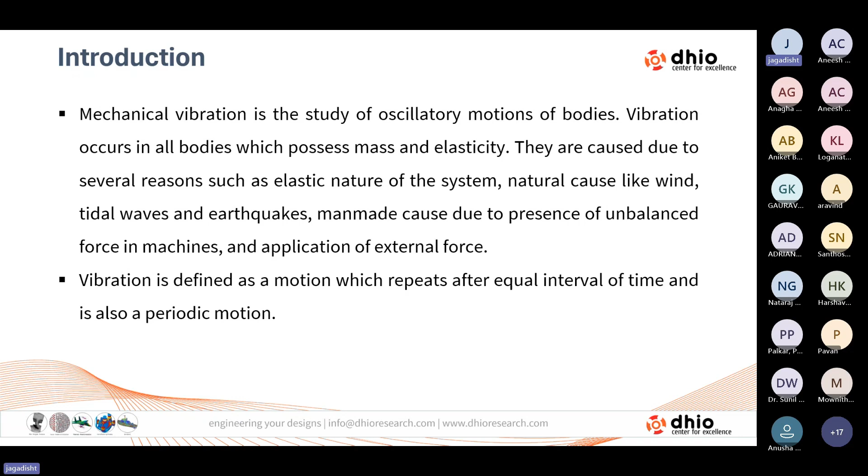So vibration is usually defined as a motion which repeats after equal intervals of time, and is also a periodic motion. That means the motion will repeat itself after a certain duration, which we call the time period of motion.

Vibrations are harmful or undesirable for engineering systems as they induce high stresses in the system components, leading to noise and failure. But here we are not discussing the desirable effects of vibration, because those have more advantages which we are not touching upon.

It is only the undesirable effects which cause harm to human beings that we will discuss. The vibrations which are undesirable and harmful are to be minimized, if not totally eliminated.

Excessive vibration causes discomfort to human beings, damage to buildings and machines, and wearing out of machine parts due to this vibration. Thus, an understanding of the basic fundamentals of vibration analysis is very important in forming

or in developing a solid background to analyze the problem of machine elements in design, and to see that vibrations are reduced to the extent, to the limit, that is exactly required.

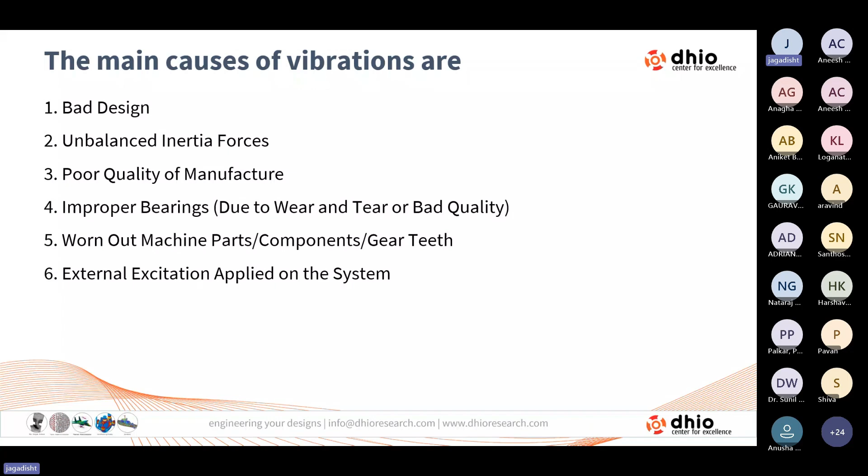Or it may be caused due to external excitation applied on the system. These external excitations may be of anything - either in the form of forces, or in the form of displacement, acceleration, or velocities. Now the effects of vibrations are as follows.

Due to this vibration, there is earlier failure due to cyclic stress. That means since the motion is going to be repeated, and if the forces are considered during this action of motion, the loading is fatigue loading and not the conventional type of loading.

All materials are observed to behave totally differently when subjected to cyclic load compared to static load analysis.

And due to this vibration, there may be an increase in wear and tear of parts, and due to this wear and tear, there may be excessive unwanted noise.

And if these kinds of parts are incorporated in the machine which produces a certain product, the product coming out of that machine may be of poor quality. So when these poor quality products are there, they're difficult to sell.

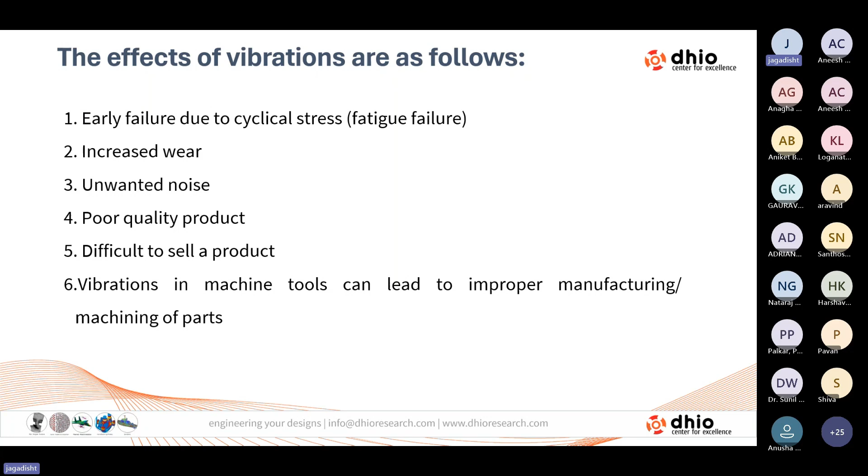Thus, vibrations in machine tools can lead to improper manufacturing or machining of parts. Now, when you want to describe the complete behavior of any dynamic system, the complete description of the vibration problem involves mainly three components.

And these components are the system, the vibrating system, and then the external stimuli, or what we call the excitation.

Due to this excitation, the system is going to be responsive. All machines can be broken into two specific categories, consisting of mass and stiffness. The mass represents an object which moves or rotates, that is, there is a certain amount of displacement in it.

Whereas the stiffness is represented by a spring, or a resistance, or a constraint of that movement. The stiffness of the body is nothing but the internal resistance offered to the displacement. So the mass and stiffness play the key role in the dynamic behavior of the system.

To reduce the vibrations, certain instruments or elements are to be incorporated to absorb the vibration energy, which we usually call damping. So every vibrating system in general comprises three parameters.

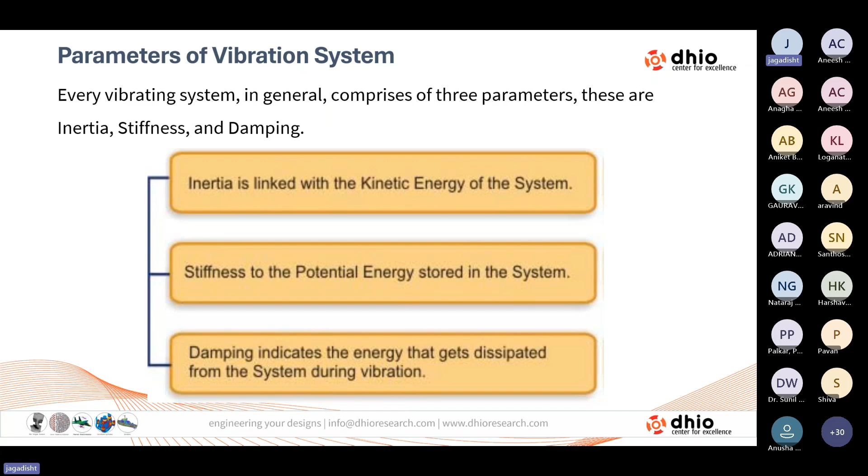We see which is causing the main reason for inducing the vibration, or if we want to reduce the vibration, how exactly the damping is to be looked upon, and whether the mass or the stiffness needs to be increased or decreased, can all be looked at in the design stage itself. So when we classify vibration, there are different methods of classifying mechanical vibration.

These are completely based on the type of vibration, the degree of freedom, the displacement, and the behavior of the system. When we talk about the type of vibration, whether it's free vibration or forced vibration: free vibration occurs due to the inherent properties of the system without any external disturbance, while forced vibrations are caused due to external excitations.

Now, whenever the system is completely vibrating due to its inherent property, without any external forces and without any energy loss, we call that an undamped system. If there is any kind of energy loss, we call it a damped system.

Then, depending on the degrees of freedom, we define the vibration as single, two, or multi-degree of freedom, or it may be a continuous system with infinite degrees of freedom. Single, two, and multi-degree of freedom systems consist of rigid bodies, whereas any body which is continuous, we call a continuous system with infinite degrees of freedom.

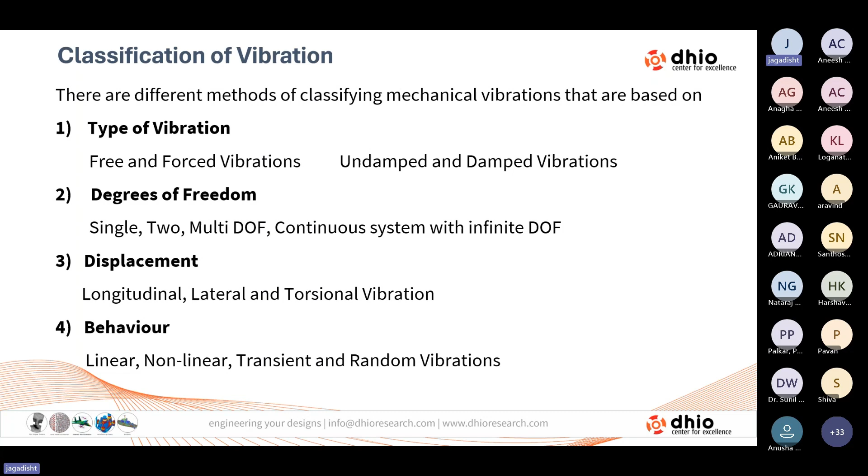If the behavior is due to sudden application of loads acting for a short duration of time, we call that transient response. And if the external excitations are random, and the behavior of the system is also random in nature, then we call that random vibration. In transient response, the system acts for a short duration of time, and the response decays back to its equilibrium position after a certain duration.

Now, certain notations are commonly used in studying dynamic systems. First is the time period—it is the time required for one complete cycle, or one to-and-fro motion, and its units are always taken in seconds.

Then we have frequency. It depends on whether it is translatory displacement or rotational displacement. It is the number of cycles per second, with units of cycles per second, defined as hertz for translatory motion. For circular motion, we call it circular frequency or angular velocity omega, defined in radians per second.

Then we also define the displacement as amplitude in dynamics. It is the displacement of the vibrating system from its equilibrium position, and its units of length are generally in millimeters or meters.

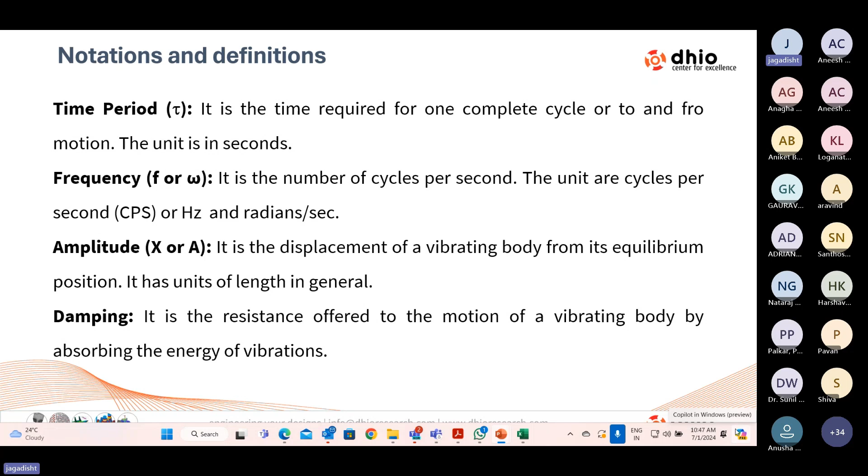Then damping is a resistance offered to the motion of a vibrating body by absorbing the energy of vibrations. There may be different types of damping, which we will look at later.

Then the type of forces or displacement considered in vibrations we call harmonic motion. These oscillatory motions may repeat themselves following a certain mathematical law regularly. When the motion repeats in equal intervals of time, it is called periodic motion. When it follows a certain mathematical law, you call that harmonic motion.

Here we consider a point moving at a constant angular velocity from a fixed point. The constant angular velocity is omega, and it traverses at this constant angular velocity. The path traced by the point P is what we define as simple harmonic motion. As it rotates at this angular velocity, it has been observed that its acceleration is always directed towards its equilibrium.

Its acceleration is always directed towards its equilibrium. When the point is moving at angular velocity omega, at any given instant of time t, it occupies position P. Since OP has distance A from the point of reference, the angle it turns through is given by theta, which equals omega t. Now the vertical distance traveled, y, can be expressed as A sin omega t.

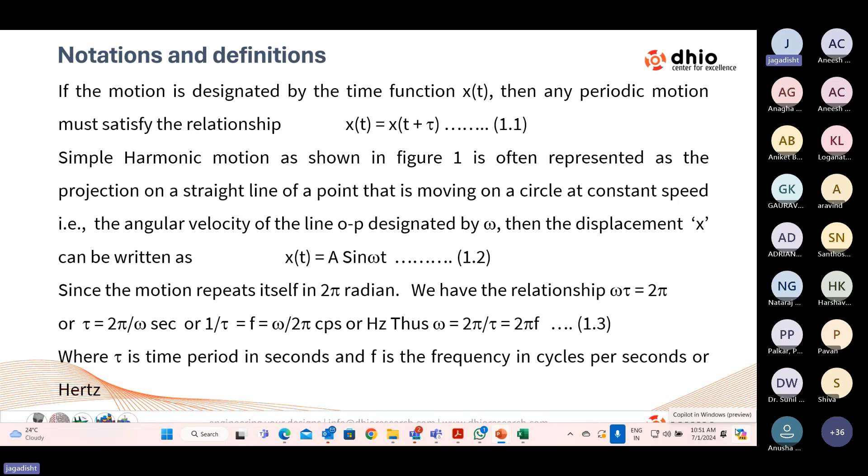Now 1 by tau, which is the number of cycles per unit time, is defined as the frequency, the reciprocal of the time period, which will now become omega by 2 pi. Thus, omega is going to be either 2 pi by tau or 2 pi f, where tau is the time period in seconds or f is the frequency in cycles per second or hertz. Using this, one can easily determine the time period and the frequency of the system.

Now we're using the dot notation for derivatives with respect to time. Any variable, when it has a derivative with respect to time in dynamics, we represent with dot notation. Thus, x is the displacement, expressed as A sin omega t.

The derivative of the displacement with respect to time is the velocity. That is, x dot is going to be equal to A omega cos omega t, which can also be expressed as A omega of sin of omega t plus pi by 2.

Then the second derivative of the displacement, which is the acceleration, defined as x double dot, is going to be equal to minus A omega square sine omega t. This minus sign can be eliminated by replacing sine omega t with sine of omega t plus pi.

Now, sine of omega t plus pi is again equal to the value of minus sine omega t, that is x, which is defined as A sin omega t. So we observe that x double dot is also going to be equal to minus omega square x. Thus, the acceleration is always directed towards the center and is proportional to the displacement, with the constant of proportionality being minus omega square.

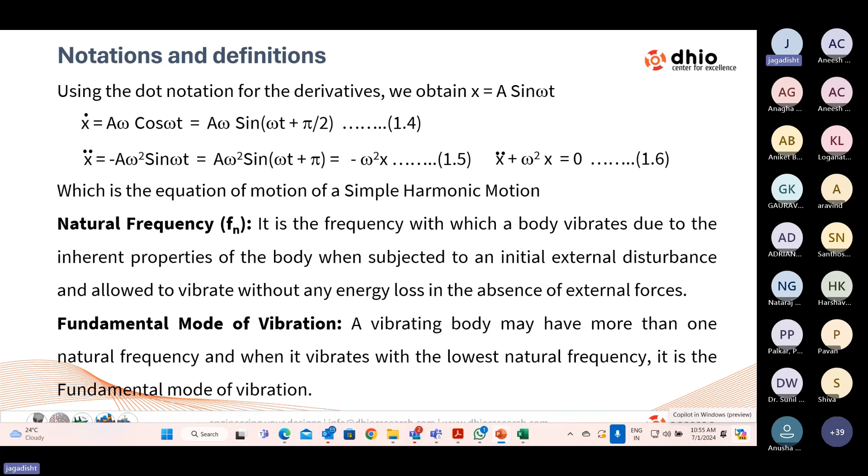Then we have the fundamental mode of vibration. As we see, a continuous system will have infinite degrees of freedom. Thus, any vibrating system may have more than one natural frequency. When it vibrates at its lowest natural frequency, that is what we call the fundamental mode of vibration, that is, the first natural frequency of the system.

Free vibration takes place when a system oscillates under the action of inherent forces in the system itself, when external impressed forces and energy losses are absent. There is no energy loss and no external forces acting. But for any slight disturbance, if the system starts to vibrate, we call this the free vibration of the system.

Now the system under free vibration will be vibrating at one or more of its frequencies, called the natural frequency, which is the property of the dynamic system established by its mass and stiffness alone, because there is no loss of energy. Damping does not interfere in this.

So the natural frequency of the system is very important in the analysis of the dynamic problem, as it provides information related to the dynamic characteristics of the system without external forces and any energy loss.

Now, the vibration that takes place under external exciting forces is called forced vibration. When the excitation is oscillatory, the system is forced to vibrate at the exciting frequency. If the frequency of excitation coincides with one of the natural frequencies of the system, a condition of resonance is encountered, resulting in dangerously large oscillations which may cause failure of the system.

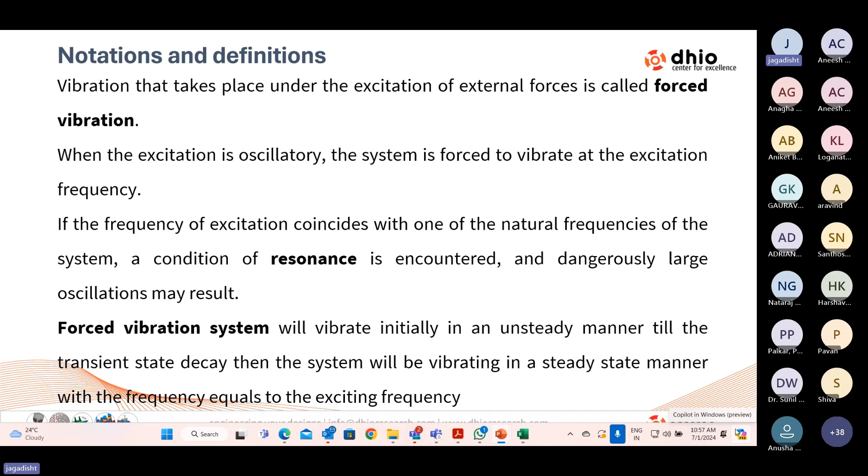The forced vibrating system will be vibrating initially in an unsteady manner till the transient state decays, and then the system will be vibrating in a steady state manner with the frequency equal to the exciting frequency.

Now let us see how, in a dynamic system, we write the equation of motion. It all depends upon the number of degrees of freedom. Depending on that, we'll have so many equations. A single degree of freedom system has one equation; a 2 degree of freedom system has 2 equations; it becomes multi-degree of freedom. An n degree system will have n equations, and a continuous system, having infinite degrees of freedom, will consist of infinite equations.

But one cannot solve all these infinite equations, so it is restricted to situations depending upon the application and the way in which instruments are available for measurement. Depending on that, restrictions about the number of frequencies and equations have to be considered.

This plays a key role in the analysis of any continuous system in the software, because it depends on how many equations you consider for the solution to make it as accurate as possible. Any dynamic system's key role depends on the mass and the stiffness, and to what extent we consider these for determining the dynamic characteristics of the system depends upon the accuracy required.

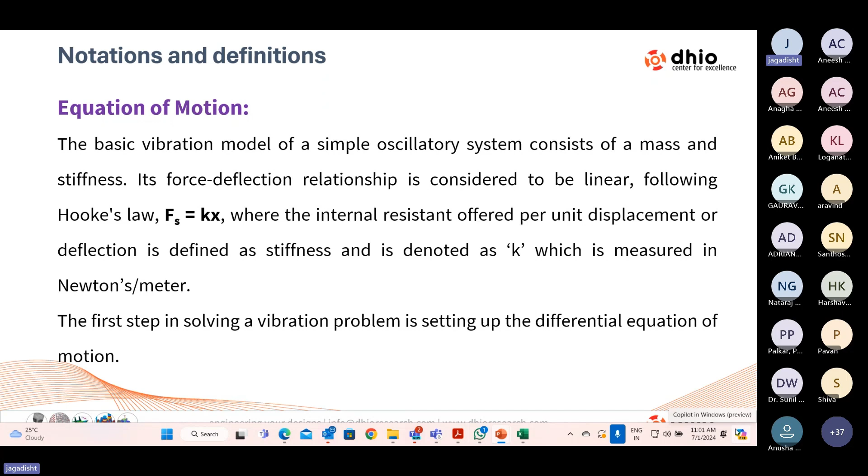The first step in solving the vibration problem is setting up the differential equation of motion. There are three approaches for this: applying Newton's second law of motion, using D'Alembert's principle, or using the energy principle. Any of these can be adopted to set up the differential equation of motion.

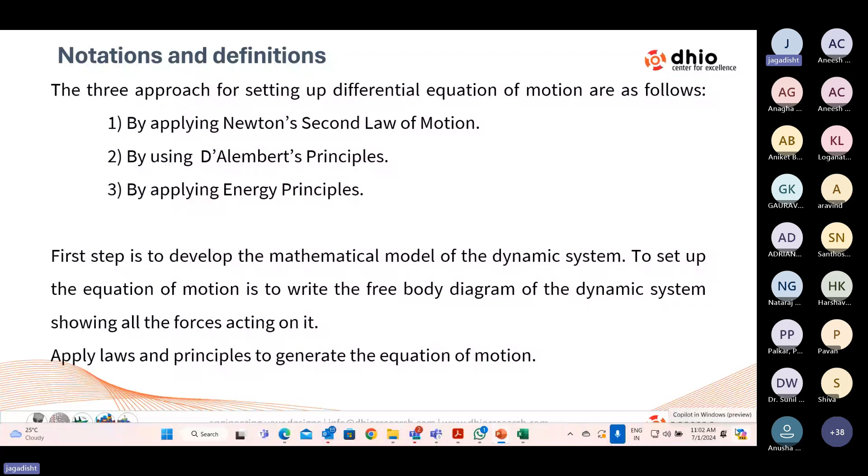Before setting up the differential equation of motion, the first thing to do is create the mathematical model of the dynamic system and study its free body diagram, which shows complete information of the forces acting on the system. Knowing these forces, you apply the laws and principles to generate the equation of motion. Whenever there is an energy loss in the system, usually called damping, this has to be considered so as to reduce the amplitude of motion.

Because most of the systems which are going to be continuously running, when excited, there is a certain region at which there is a variation, as in the initial stage of starting. One cannot start directly to a higher level, it has to be gradually started. Similarly, one cannot stop any of the systems suddenly, it has to be gradually stopped.

Now, during this stage, there is a variation in the frequencies. So when these frequencies are varied, we have to look into it so that this exciting frequency will never coincide with the natural frequency of the system, to avoid resonance, for which to control the amplitude, one has to provide some energy absorbers, which we call damping.

There are various types of damping associated in engineering practice. First is viscous damping, which is nothing but the lubricated sliding surface. Then Coulomb damping or dry friction damping, which occurs due to the dry friction sliding of surfaces. The structural or the hysteresis solid damping, which is due to internal friction in the molecules.

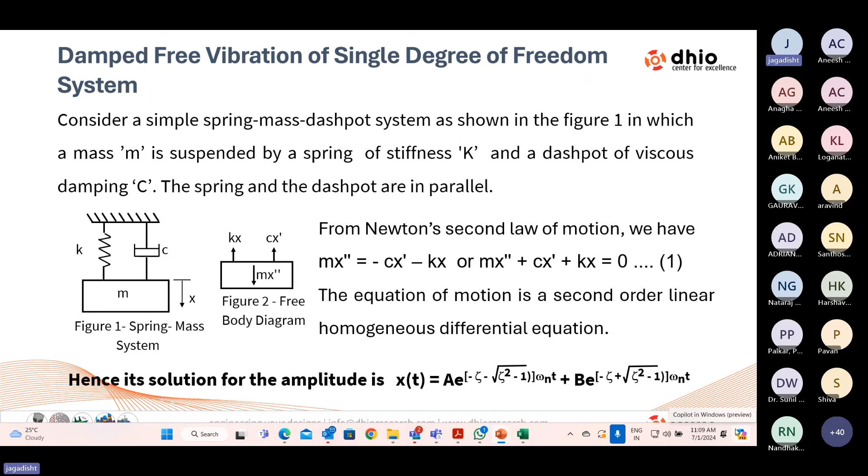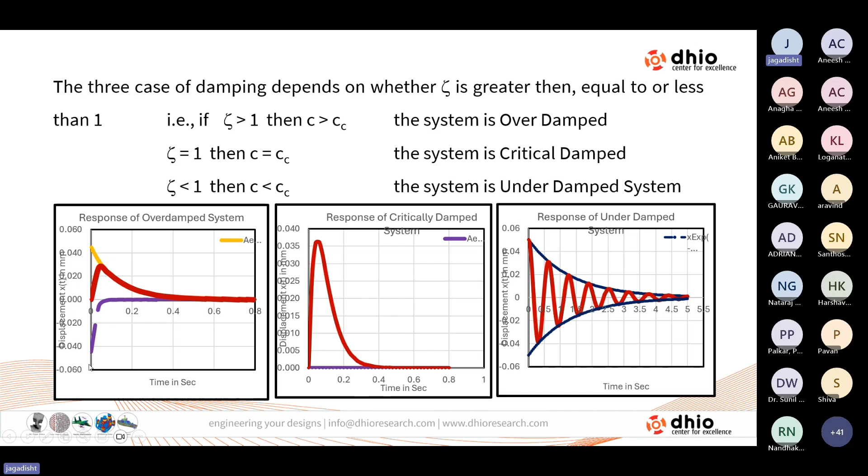We also define, in the case of a dynamic system, the ratios of two successive amplitudes in terms of the logarithm, which are going to have a constant value. This we define as the logarithmic decrement. This logarithmic decrement is going to have a constant value for two successive amplitudes, which is nothing but the logarithmic term of the ratio of the two successive amplitudes.

When the system is disturbed from its equilibrium position, it executes free vibration because of its own elastic properties. When there are no forces, the system returns to its equilibrium, depending upon the amount of damping present in it. In the previous case, for an underdamped system, we can see how much time it takes for decaying.

Now, in case of a forced vibrating system, this external impressed force acting on the system keeps it continuously vibrating. Thus, it is very important for the designer to generate a mathematical model for the system which is being subjected to the forcing function, and then analyze it.

In general, there are three types of forcing functions commonly encountered in engineering practice. The first is the periodic or harmonic forcing function, meaning its time period is fixed, and the variations of this forcing function can be described by simple mathematical equations following a certain law.

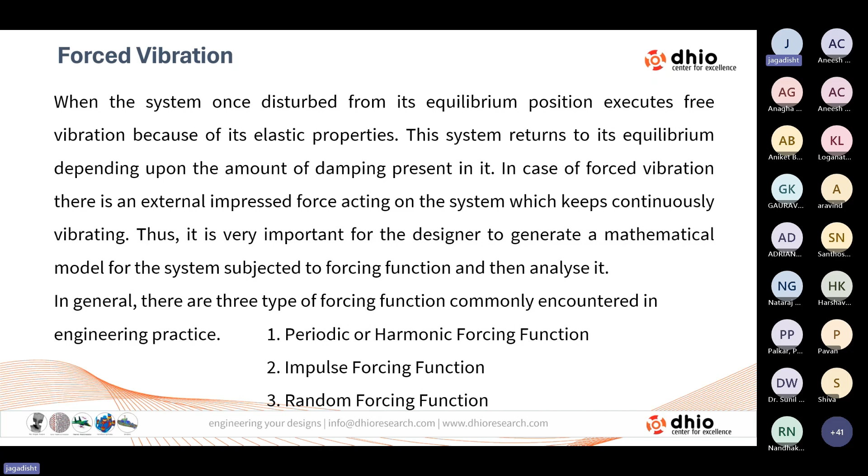The second type of forcing function is an impulse forcing function, which has a very high magnitude acting for a very short duration of time. When the forces are random in nature, we call it the random forcing function.

When the forcing function is harmonic or periodic, the dynamic behavior is studied based on the technique which determines the steady state response of a structure. We don't look at the transient state, because when the force is suddenly applied, initially it may behave transiently, and then after a certain duration of time, it reaches a steady state response. Thus, the general equation of motion will depend upon the force and the displacement.

These force and displacement are also assumed to be harmonic in nature, in which the forcing function F can be expressed as F naught sine omega t, and X as capital X sine omega t, where X is the amplitude of vibration and omega is the impressed frequency of the external forces.

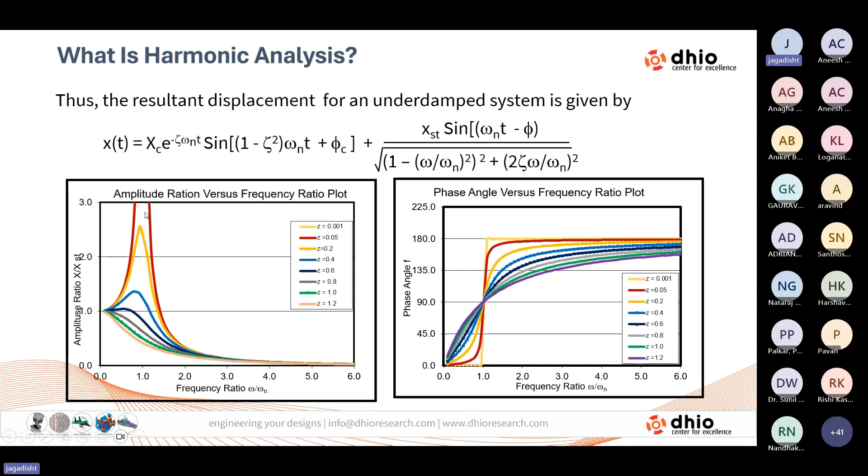Now, when there is a rotating unbalance - in the previous case we considered an externally impressed force - here it may be due to reciprocating or rotating members causing certain unbalance in the force. These unbalanced forces are taken into account and the equation of motion is expressed as m x double dot plus c x dot plus k x equal to m e omega square sin omega t, where m e is the eccentric mass effect.

Similarly, for the reciprocating mass, similar equations can be obtained. This is the same as the previous case where the harmonic force excites the system, except that F naught is now replaced by m e omega square.

Thus the steady state solution is m e omega square divided by the root of k minus m omega square whole square plus c omega square. The phase difference between the displacement and the force is tan inverse of c omega divided by k minus m omega square.

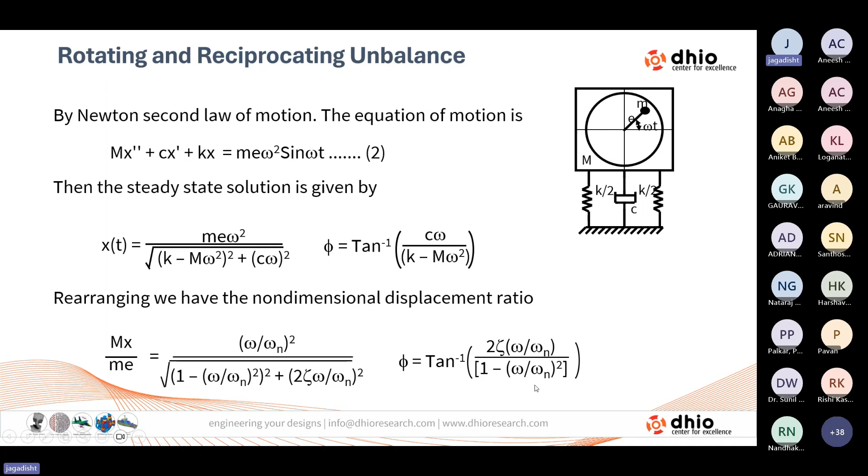Now again, considering the terms in terms of the frequency ratios and expressing the damping in terms of the damping factor, we have the amplitude ratio in non-dimensional form written as m x by m e equal to omega by omega n square, divided by root of 1 minus omega by omega n whole square plus 2 zeta omega by omega n square. The phase difference between the displacement and the forcing function is given by tan inverse of 2 zeta omega by omega n divided by 1 minus omega by omega n square.

Another case of forcing function is due to support motion. Instead of an external force acting on the system, if the support itself has certain motion, one can describe the dynamic behavior of the system. If the support is harmonically excited as y equal to capital Y sin omega t, the mass of the system will have displacement that is also harmonic, given by x sin omega t. The equation of motion is m x double dot plus c x dot plus k x equal to c y dot plus k y. This again gives us two types of response: one is a partial transient for a small duration of time, and then the steady state response.

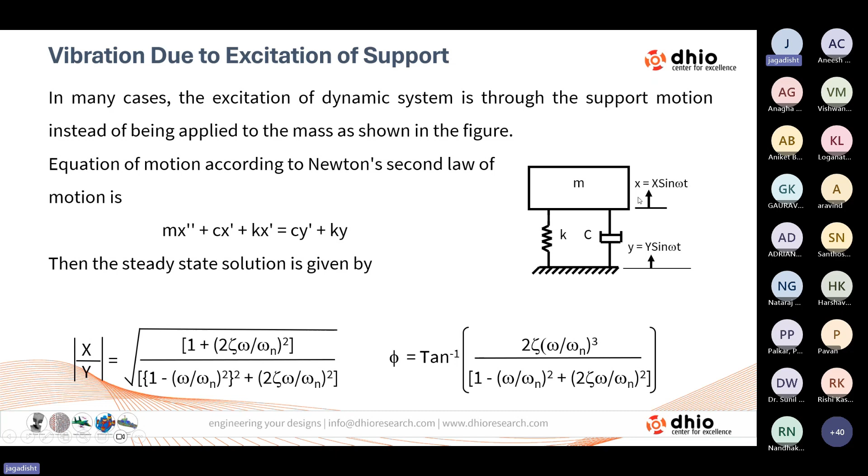Usually the transient response is neglected; it is the steady state response which gives us the complete information. The steady state solution is given by the amplitude ratio of the mass motion to that of the support motion, x by y, given by root of 1 plus (2 zeta omega by omega n) square, divided by (1 minus omega by omega n square) plus (2 zeta omega by omega n) square. The phase difference between the displacements of the support and the mass is given by this expression.

The same expression can also be used for what is called transmissibility, which arises due to motion or due to force. In certain cases, specifically in measuring instruments, we try to measure the amplitude, velocity, and acceleration, and for this we make use of this theory to see how exactly the information is being captured, or if the force is transmitted to the foundation or to the machine, both can be observed here.

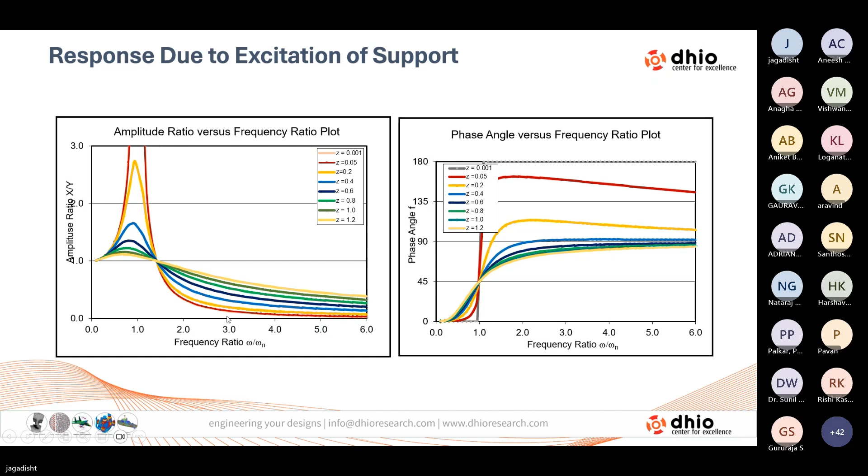Since the mass is in the denominator term, as you reduce the mass, the frequency increases; as you increase the mass, the frequency decreases. Whereas in the region where the frequency ratio is greater than root 2, the damping does not play much of a role; it is the stiffness of the system which plays the key role in the behavior of the system. So these are the things which are to be looked upon.

Now, exactly how vibration isolation has to be done: as we discussed, isolators are vibration absorbers placed between the vibrating system and the supporting structure. The isolating material may be a pad of rubber, felt, or cork, or a metallic spring, or a viscous damper. The effectiveness of isolation may be measured in terms of the force or the motion transmitted. There are two types of isolation, force isolation and motion isolation.

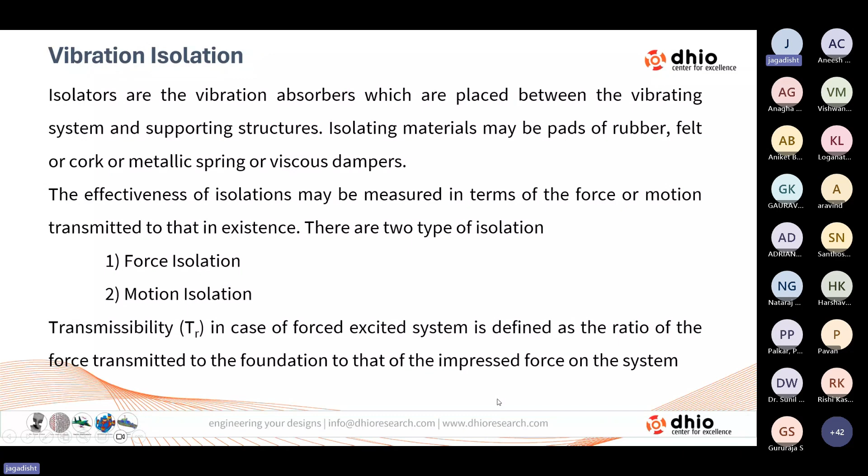That's why transmissibility is defined, in the case of a force exciting system, as the ratio of the force transmitted to the foundation to that of the impressed force. Here again, in the same system, the transmissibility can be expressed as the ratio of the force transmitted to the system to that of the impressed force, given by this expression, which is similar to the previous case.

Thus, when the damping is negligible, the system can be treated as an undamped system in which the transmissibility is equal to 1 divided by (omega by omega n square minus 1). Thus, when omega by omega n equals 1, the transmissibility will shoot to infinity because the denominator term becomes 0. So this has to be reduced.

It can be observed that for the transmissibility to take place appropriately, the frequency ratio omega by omega n should always be greater than root 2. In an undamped system, from static equilibrium conditions, the weight of the system should be equal to the static deflection into the spring constant. With this, one can define omega as K by M equal to G by delta, or K by M, which is omega square, can be replaced by G by delta.

So if you know the static deflection of the system, one can easily determine the frequency. Thus the transmissibility ratio can be expressed as 1 by [(2 pi f) square into delta by G minus 1].

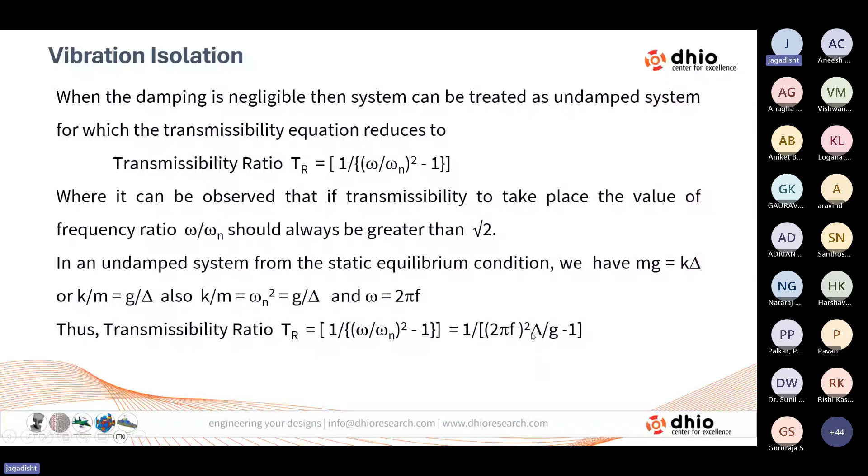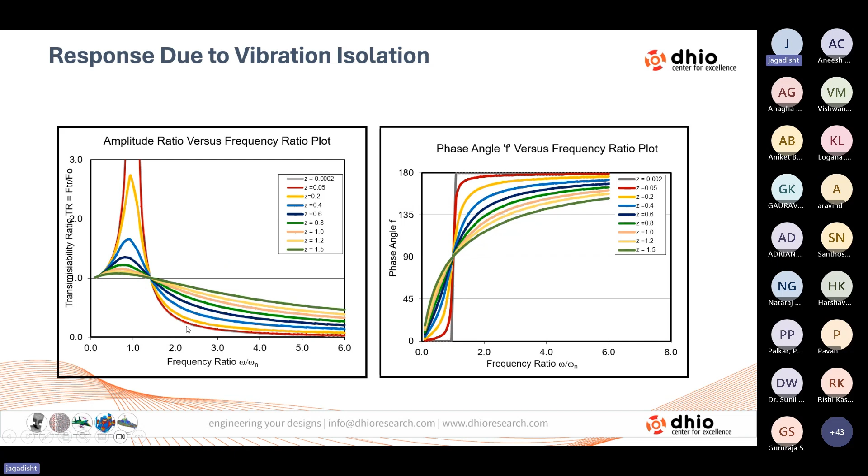When a damping system is subjected to a sudden aperiodic function, that's the transient response. The response of the system whenever subjected to a sudden loading is temporarily sustained vibration, and then it decays out. This transient loading is also known as impact or mechanical shock, or aperiodic excitation characterized by a sudden or severe application.

In real life, mechanical shock is very common, like a free drop of an item from a height, an automobile passing through a road bump, or a shock in a forging hammer, etc.

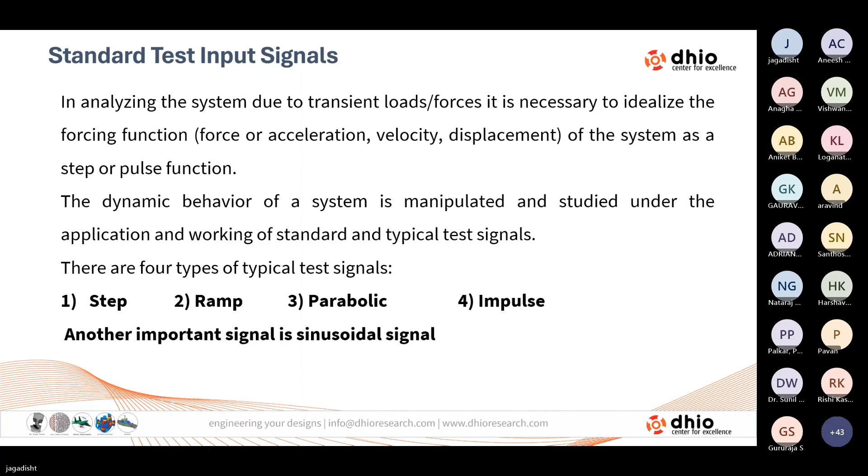Now, in analyzing the system for transient loads, it is necessary to idealize the forcing function. The dynamic behavior of the system is studied under application of forcing in a standardized manner by considering four types of typical test signals: step, ramp, parabolic, and impulse. Apart from this, the conventional harmonic function, which is a sinusoidal signal, is also considered.

Unit step signal defines a sudden change in the properties of the actual signal, where it can be defined as R of t equal to A for time t greater than 0, and equal to 0 for time t less than 0. When A is equal to 1, it is called a unit step signal.

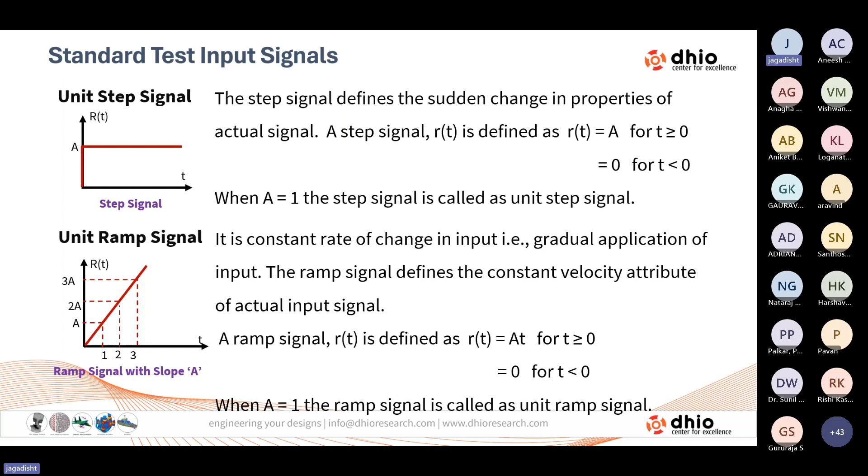Unit ramp signal represents a constant rate of change in the input, a gradual application of the input. The ramp signal defines the constant velocity attribute of the actual input signal. This ramp signal R of t can be defined as A times t for t greater than 0, and equal to 0 for t less than 0. When A equal to 1, we call that a unit ramp, meaning it is directly proportional.

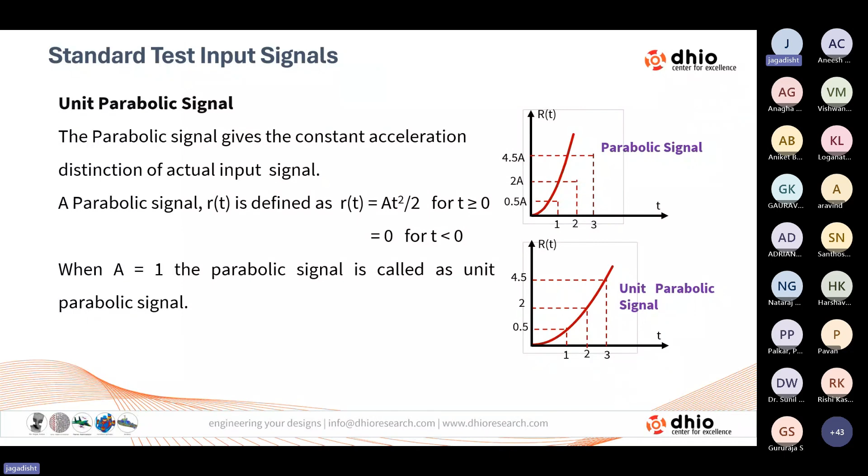A parabolic signal gives us the second derivative, the acceleration, of the actual input signal. It is defined by R of t equal to A t squared by 2 for t greater than or equal to 0, and equal to 0 for t less than 0. When A equal to 1, the parabolic signal is called a unit parabolic signal, commonly used for predicting acceleration in measuring equipment.

When f prime is equal to unity, such a forcing in the limiting case where epsilon tends to zero is called a unit impulse, or delta function. A delta function at t equal to z is defined by the symbol delta of t minus z, with the property that delta of t minus z equals 0 for all t except at z, where for a small duration epsilon, the impulse force of high magnitude acts. If delta of t minus z is multiplied by any time function f of t, the product gives 0 everywhere except at t equal to z, and its time integral is given by the integral of f of t into delta of t minus z into dt.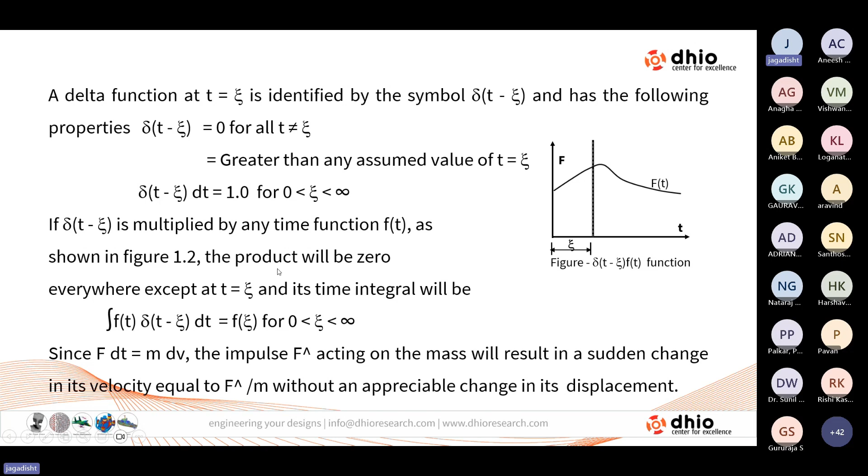Because here dv by dt will be equal to f prime by m, without an appreciable change in the displacement. Thus, for a damped free vibrating single degree of freedom spring mass dashpot system, we have considered the equation of motion here, in which the initial conditions at time t equal to 0, the displacement is 0, and at time t equal to 0, the velocity is what we expect.

Now, the response of the spring mass dashpot system, initially at rest and excited by an impulse f prime, will have the initial condition x equal to 0 and x dot equal to f prime by m. Then the equation of motion here x dot is now replaced by f prime by m, and that is going to give us the expression for the response of the system.

And thus this can be written as x of t equal to f prime into h of t, where h of t represents the exponential decaying of the system. That is f e to the power of minus zeta omega n t divided by m omega n into root of 1 minus zeta square, into sine of root of 1 minus zeta square omega n t. Now here, root of 1 minus zeta square omega n is also called the damped frequency.

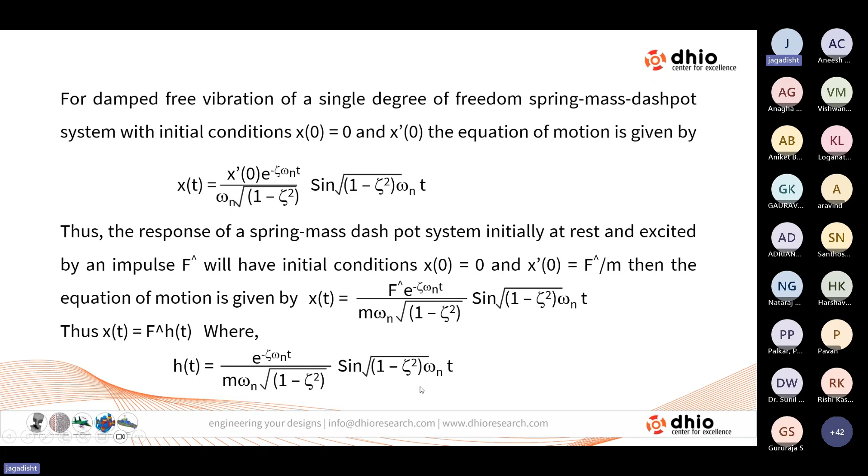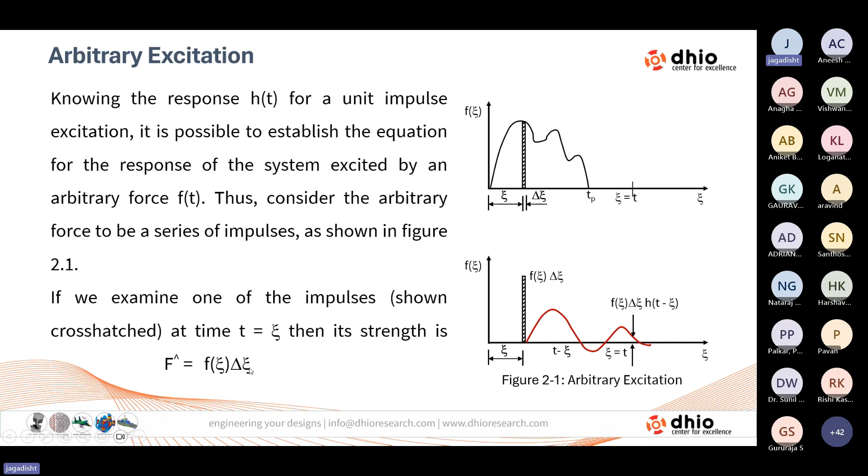Now, if any arbitrary excitation is there, then one can consider that to be made up of many impulses. Now, if you consider one impulse, how exactly the response for this impulse is going to be, and then further it can be treated. Thus, we have some standard test signals for which the Laplace transform is used.

Because here we always try to study initially in the time domain and then convert it into the frequency domain. So when we talk about the frequency domain, it is always easier to consider the mathematical formulation. So thus the time domain, the differential equations in the time variables, is now converted into the frequency domain by using the Laplace transformation, and then adopt the Laplace transformation method to solve this differential equation. Then take up the inverse Laplace transformation and convert it into the time domain back.

So thus we'll be writing down certain expressions which is going to have the standard signal and the corresponding Laplace transformation, converting the time domain to the frequency domain. So similarly, the random vibrating system can also be treated, in which most of the random analysis is being treated using the statistical techniques. And that's the reason in the solvers, that is in the software, we don't have the term random analysis. Instead of that, we call it spectral density analysis.

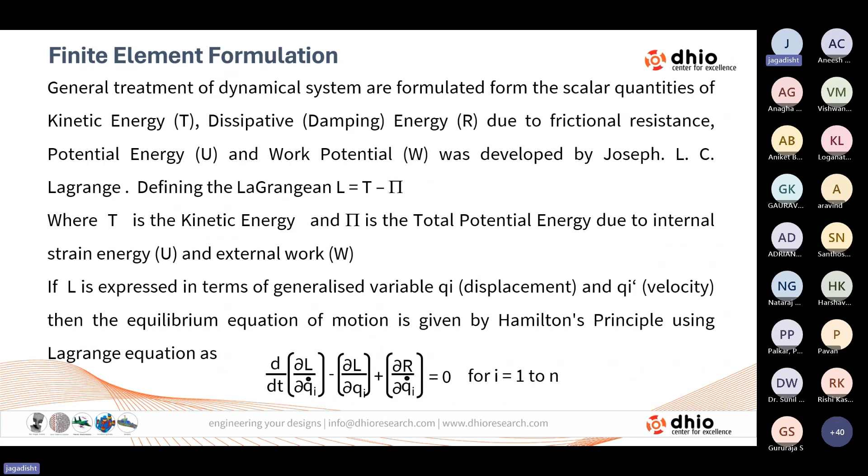By Hamilton's principle, the Lagrangian leads to the expression d/dt(dL/dq̇i) minus dL/dqi plus d(R)/dq̇i equals 0, where R is the dissipating energy.

For a body with distributed mass, the kinetic energy is expressed as half times the integral over the volume of density rho times velocity squared, that is the displacement derivative squared, expressed as half times the integral over the volume of rho times u dot squared dV.

Similarly, the strain energy is expressed in terms of stress and strain, which in turn is expressed in terms of stiffness and displacement. The work done is due to body force, traction force, concentrated force, and moment. All these are considered in finite element formulation, expressed in terms of displacements.

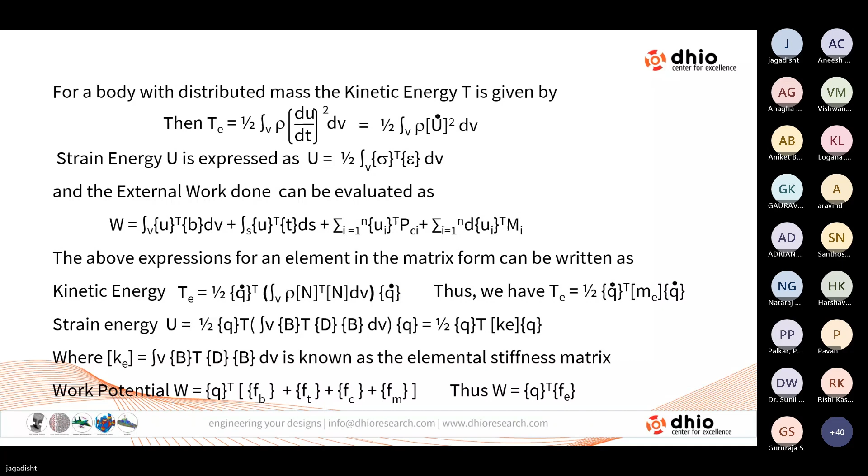The kinetic energy is expressed as half times q dot transpose into me into q dot, where q dot is the velocity function. The strain energy is expressed as q transpose into ke into q, where q is the displacement and k is the stiffness, and the work potential is force times displacement.

The total energy for the general elastic body is obtained by summing up and assembling over the overall problem, where the total energy is given by half times capital Q transpose into K Q, minus Q transpose into F. The kinetic energy is half times Q dot transpose into M into Q dot, where M is the mass matrix, K is the stiffness matrix, and F is the external forcing function.

Using the Lagrangian and applying Hamilton's principle with the partial differential equation as expressed previously, one finally arrives at the equation of motion as M q double dot plus K q minus F equal to 0, or M q double dot plus K q equal to F.

This is the general equation of motion for a vibrating system with external forces. If external forces are absent, we call it a free vibrating system, and it is undamped, for which the equation of motion becomes M q double dot plus K q equal to 0.

For a damped system, the damping coefficient is directly proportional to the velocity vector, hence C q dot is incorporated. When external force along with damping is incorporated, the equation to be solved in the finite element method is M q double dot plus C q dot plus K q equal to F. This is the equation of motion for a general damped forced vibrating system.

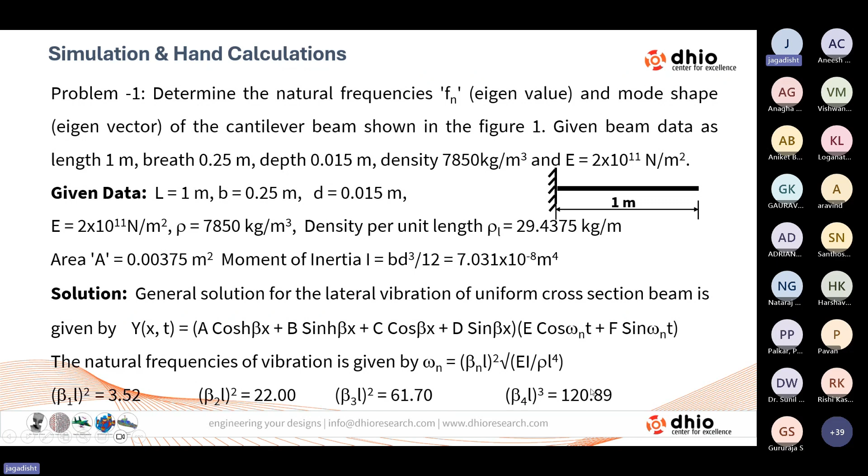These constants for different boundary conditions are specified for different modes—this is for the first mode, second mode, third and fourth modes, as generally expressed in almost all textbooks. Using this along with the geometry, moment of inertia, Young's modulus, and density of the system, one can predict the frequency.

Substituting the values and predicting the frequency analytically. This is the fundamental frequency of the cantilever beam, which is 12.245, and this is the second, and this is the third

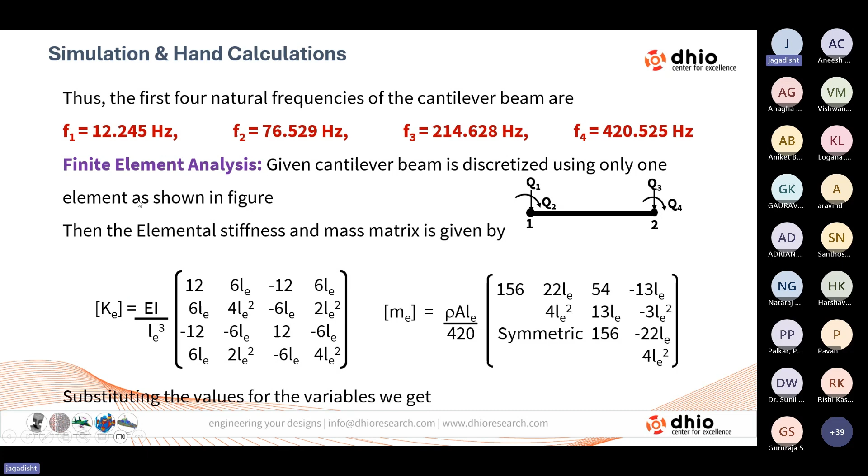and fourth. Now, using finite element analysis, theoretically this has been calculated and we arrived at the stiffness matrix and the mass matrix, and then expressed that in the characteristic equation.

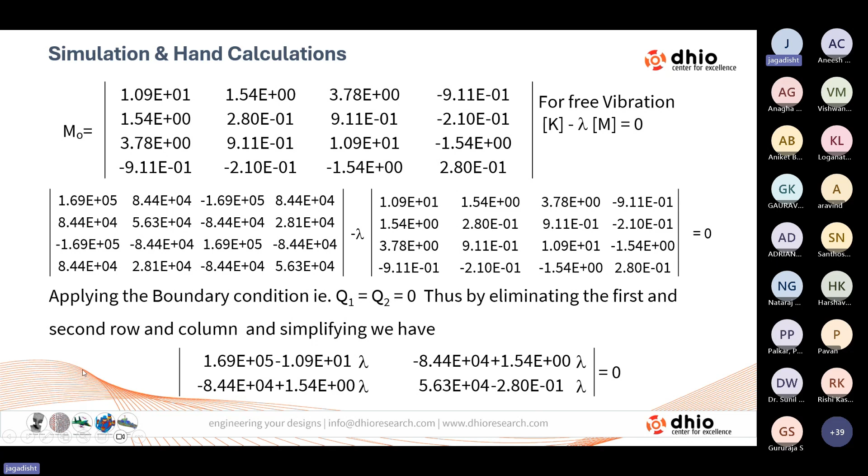Now, applying the loading and the boundary conditions, treating the boundary conditions, eliminating the degrees of freedom at the boundaries reduces the size of the matrix. Now, solving this equation, one will obtain what we call eigenvalues.

These eigenvalues are nothing but the square of the frequencies. So these are the frequencies for which theoretically we have seen the value. Analytically also we have seen that the first fundamental frequency is 12.245.

But the finite element method gives the value as 12.2489, and the second frequency is 121. This is an approximate result because of using a one-dimensional element.

Now the same problem is solved using ANSYS software, and it is determined that the first frequency is 12.2289, and this is the corresponding mode.

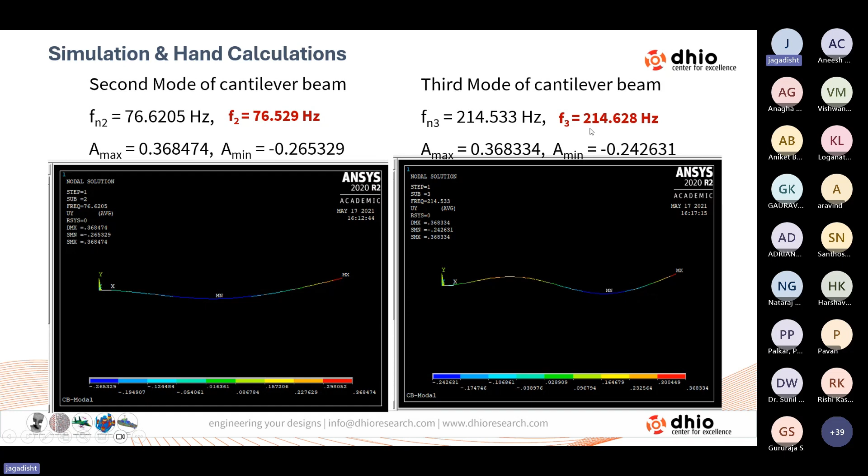The second frequency is found to be 76.529, and here it is 76.6205. The third frequency is 214.53, and here it is 214.628. So for the first four frequencies, the period has been calculated analytically,

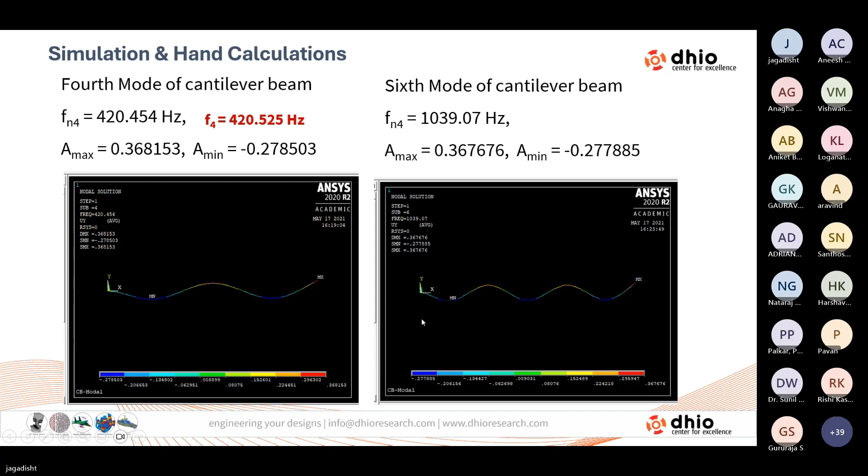which compares very well even with the one-dimensional analysis. Whereas if you go for a three-dimensional analysis, one can determine the three-dimensional dynamic behavior of the system. And even here, the results are compared with the analytical solutions and are found to coincide with the exact values.

Now one can see that in the one-dimensional analysis, the second mode was given as 200 something. That is because it considers only translatory displacement, no rotation. Whereas in the three-dimensional case, you can observe that it is the twisting torsional mode of the cantilever beam, and that is different.

These are the higher mode frequencies which combine modes having longitudinal, lateral, as well as twisting components. This one also has all three mixed modes.

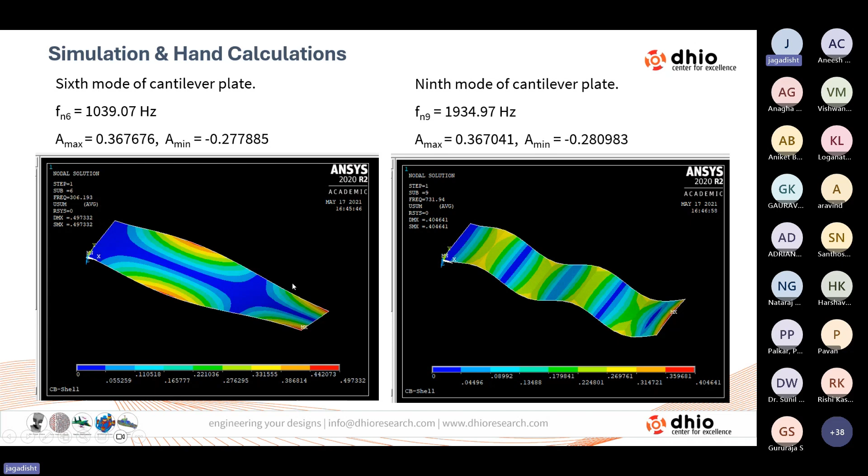Now, whenever we try to do this in practical situations, before doing the modal analysis, one has to cross-check whether the results obtained are accurate or not, for which initially we perform a self-weight analysis.

In the self-weight analysis, check the reaction force, take the mass, and the standard acceleration due to gravity given. The gravity load causes this, and it will give you the reaction forces. First, compare these — the reaction force should be equal to the gravitational force.

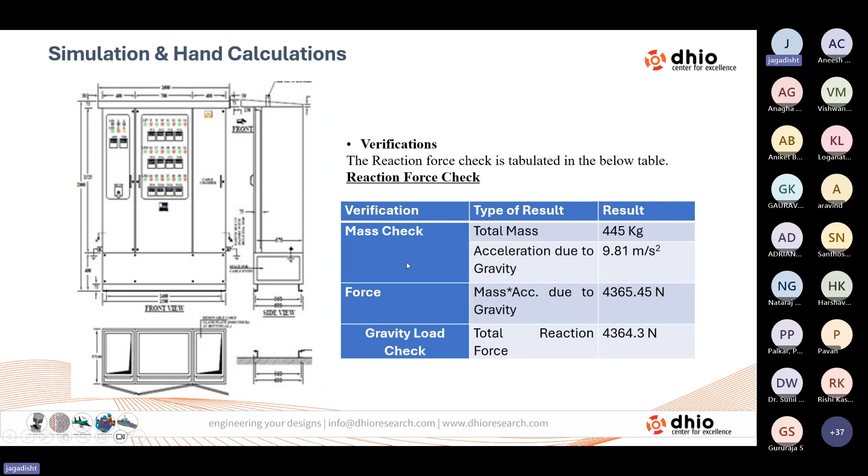Once that is compared, then you perform the analysis, do these calculations, and verify the results. So we analyzed one practical case where the total mass was 445, acceleration due to gravity was applied,

and the reaction force we obtained is 4364.3. From this, you calculate the deflection — that is, you extract the deflection at the center of mass of the system. And that has been found to be this value.

Now, using this, find the frequency. From the modal analysis, the first mode natural frequency was found to be 21.71, whereas the calculated one, using the static deflection of the system, is 20.1. It's almost very close. Once this is confirmed, then you proceed further with any other dynamic analysis.

And to arrive at these solutions, one also has to look at the mass participation factor. The mass participation factor should be more than 90%.

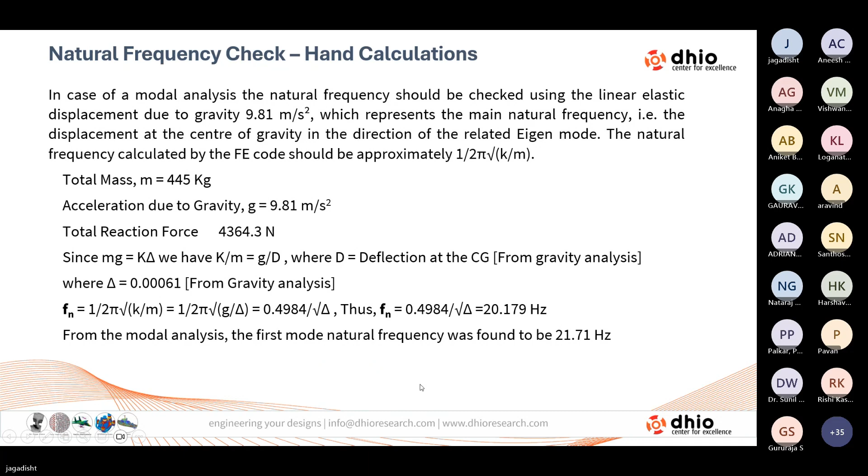So this is about the theoretical aspects. If you have any questions.

Jagadish sir said that to estimate the frequency of a component, or the natural frequency, we need to first find the natural frequencies by using modal analysis. So we need to perform the modal analysis.

Here, by dragging and dropping the modal analysis from the analysis system in the workbench, we then need to insert the material details in the engineering data, where you can insert your own material by typing its name and inserting its properties. Later on, you need to import the geometry, and then under the model we need to set up the boundary conditions and loading.

Here when we import the geometry, we will get two geometries. I have created two simple cubes to replicate the 2 degrees of freedom spring mass system, and I have connected the two springs. I have not modeled the actual springs here because when we model actual springs, it may get complicated while meshing. So we can represent the stiffness and damping effect of the springs by using the connection group in ANSYS.

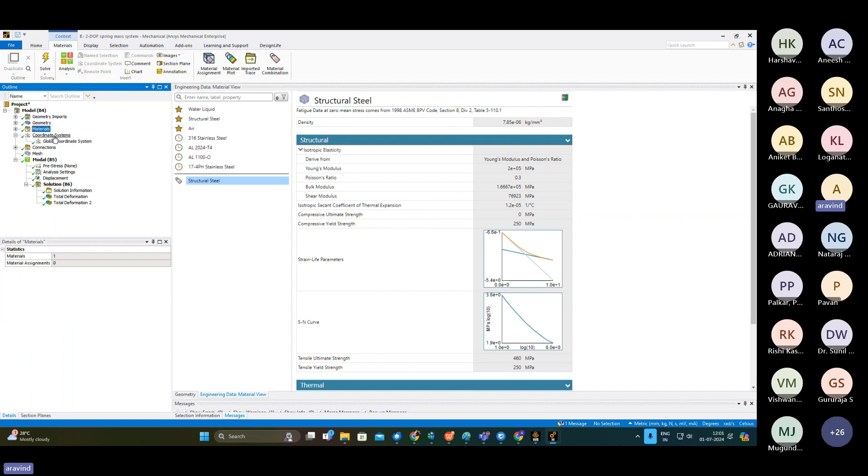If you are interested to analyze the spring stresses and the deformation, then you need to design the spring. If not, you can insert the spring as a rigid model in connections. Then you need to check the material details under materials, and if you want any coordinate system to represent, you can insert the coordinate system here.

As I said, in connections, you need to right click and insert springs. Here you get the springs and you need to input the details. Here we consider this top of the spring is connected to some plates or some mounting. That mounting is not considered, so we consider it as the ground. So here we are mentioning it as body to ground in the scope. So only one scope is needed, which is a scope mobile. Here we need to select this face.

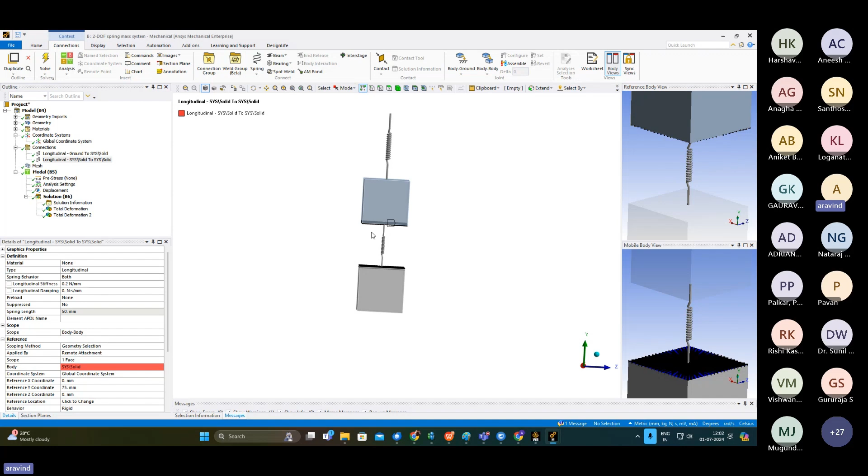We need to assign the stiffness value here, the longitudinal stiffness, and the same thing for the second spring between the two cubes. Here we need to give them as a scope between body to body, because here we are connecting two bodies with the help of the spring, and we need to mention the stiffness.

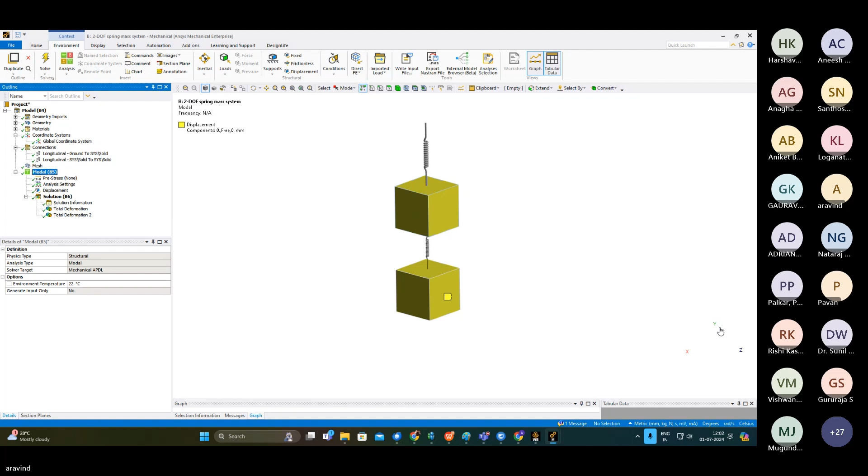After defining all these things, you need to mesh the component, and then you need to insert the displacement. Let's say you need to insert some displacement in the downward direction for these two components, which means the displacement is set to free only in the y direction, so it can oscillate in only the y direction to extract the first two mode frequencies, mode shape and frequency.

After inserting this, we can extract the maximum number of frequencies by defining the number of modes we need. I have inserted six, we can extract more than that. In the upcoming example, I'm going to show how we can extract more by inserting a higher number of frequency modes. For now we keep it to two or six, and then insert the displacement.

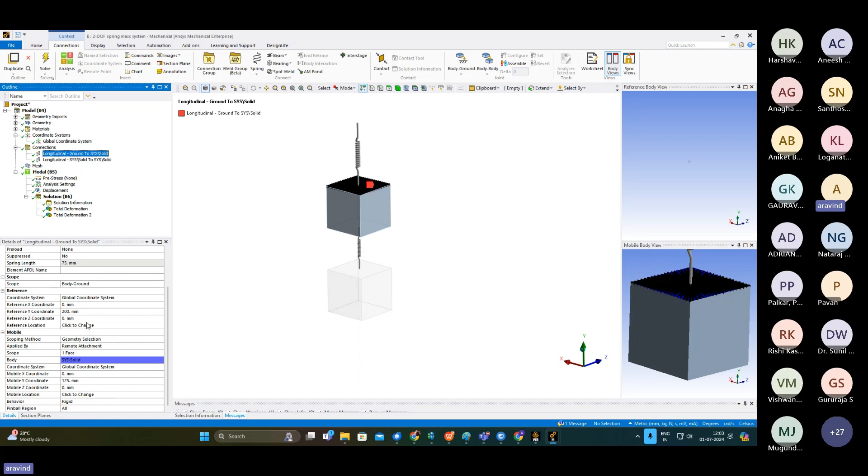And here we are not going to define the boundary condition. Why? Because we have already defined the spring as mounted to some ground location here. So this point is going to act as a ground or some wall, so it will act as a boundary condition. Then we need to insert only the loading condition here, that is the displacement, and then solve it.

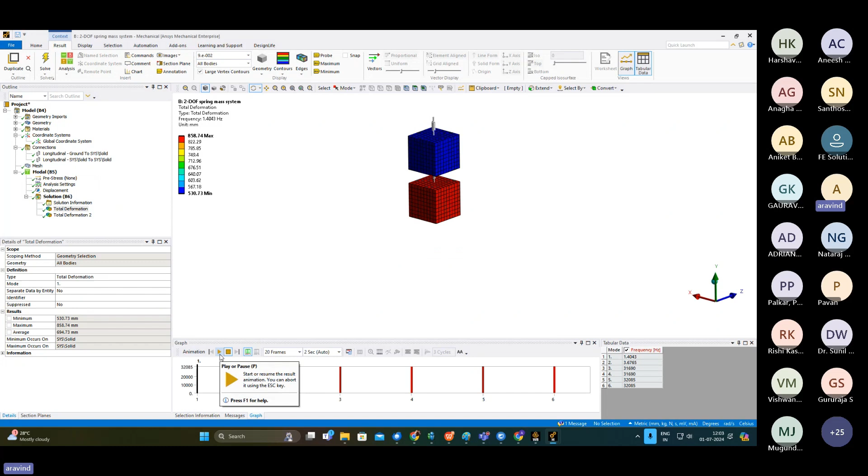After solving, we can get the deformation or the mode shapes. Under mode shapes, this will be the first mode, where both masses will oscillate in the same direction like this. And in the second mode, you can see they are out of phase, like these two conditions.

This can be evaluated by the formula, in which mass m1 is 0.981 kg and mass 2 has the same mass, and the stiffness we have inserted is 200 Newton per meter for the first spring and 200 Newton per meter for the second. We have a formula to find angular frequency omega 1 and omega 2. By finding omega 1 and omega 2, we can find the natural frequency. We know the formula, f equals omega divided by 2 pi. With hand calculation, we got f1 and f2, the first frequency and the second frequency.

The same frequency value we got from the ANSYS solution, that is 1.4 and 3.6. Here you can check, 1.4 and 3.67, nearly equal to the hand calculated example problem.

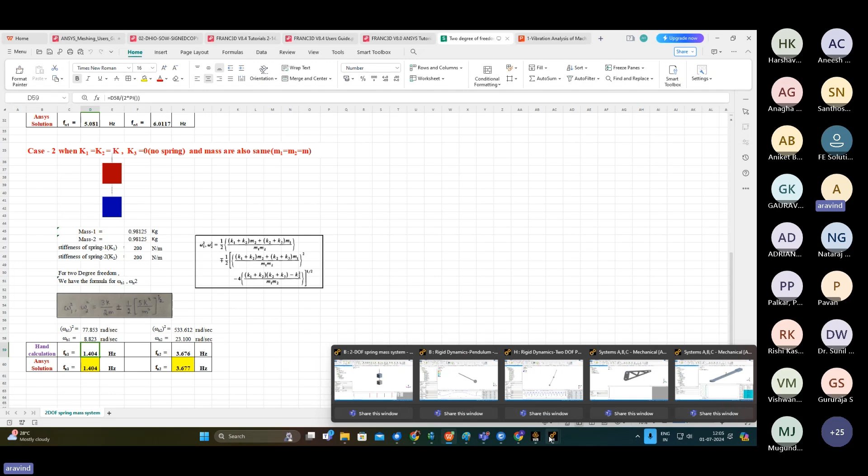The next example is on harmonic analysis. Under this harmonic analysis, one more thing here is the participation factor, as Devi sir mentioned in the theory session. We have the mass of about 1.96 kgs. This is to be considered in some cases, if the client or customer has not mentioned any frequency range, you can extract up to 90%.

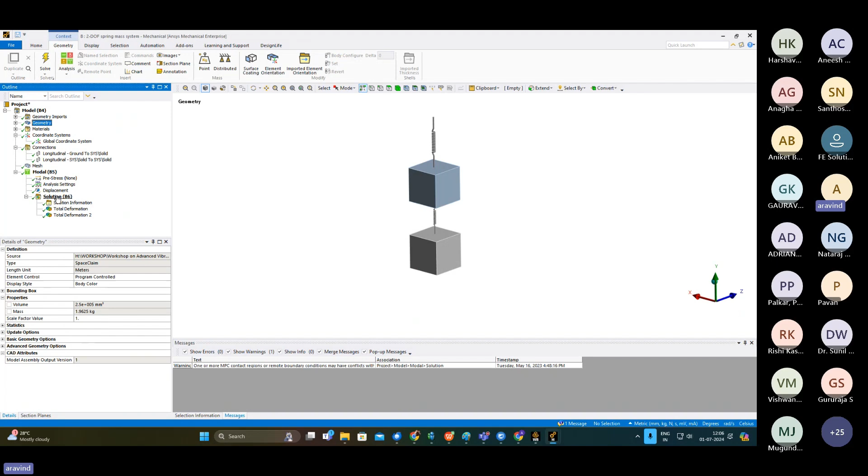If they have mentioned the operating range frequency, we can extract up to that range. Let's say from 1 hertz to 1000 hertz, then we can extract only up to 1000 hertz. If not mentioned, then we need to extract up to 90% of the participation factor. We got an effective mass of about 1.9, out of the total mass of 1.96. We got this in the participation of effective mass, and in the same way, the ratio of effective mass to total mass in the y direction is 1, meaning the complete mass is included in this modal analysis within the 6 modes of frequency.

For this bracket analysis, we can perform the frequency response, like for the applied load, how the geometry is going to behave under its mode shapes. So first we need to...

The statics analysis is performed to know the reaction forces at the fixed location, and the modal analysis is performed to extract the natural frequency of the bracket, and the harmonic analysis is performed to extract the FRF, the frequency response from the system.

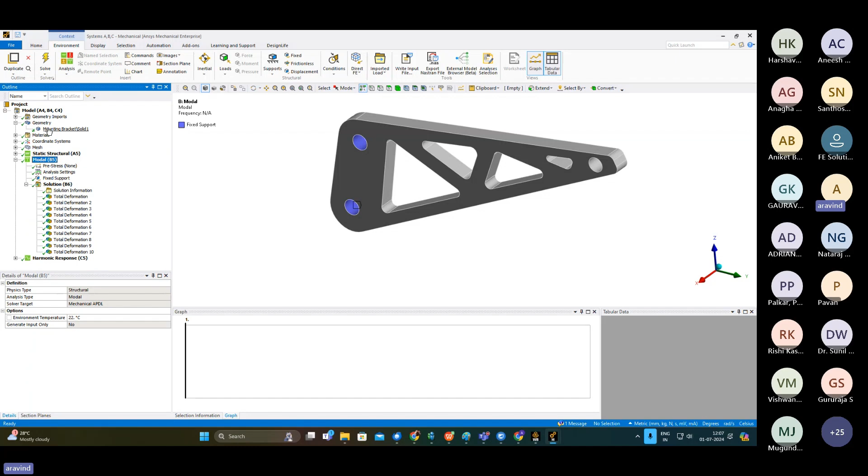Then here the static case is performed. Under the modal analysis, as I said, first we need to insert the geometry in SpaceClaim, and the same thing will be used for the remaining cases, the same engineering data and the meshing.

Due to time constraint, I'm not going to explain much into these options like material and the geometry. We can focus more on the simulation part. After inserting the material, that material will be seen in the material details.

We have considered aluminum as the material here, and we need to assign the material in the mounting bracket location in the material details assignment as aluminum. If you have any structural steel or stainless steel, by selecting those things, we can insert the material.

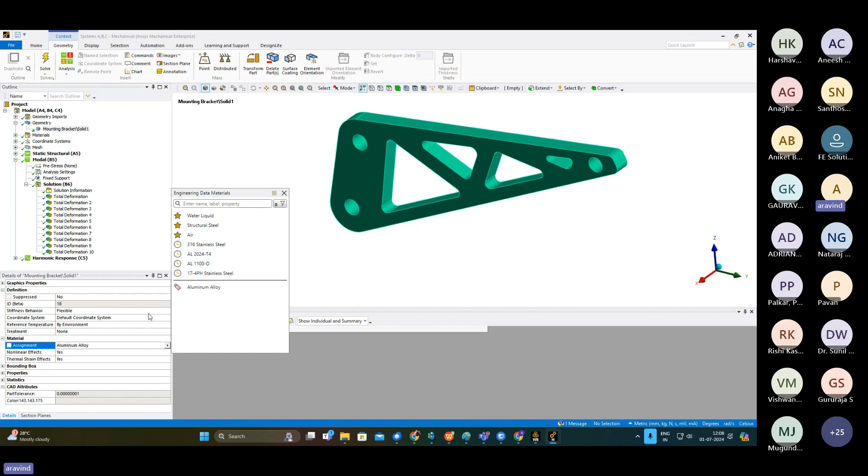We need to mesh the component to capture the curvature. Some defeaturing options and the capture curvature options are being used to have the capturing of the curvatures. And then...

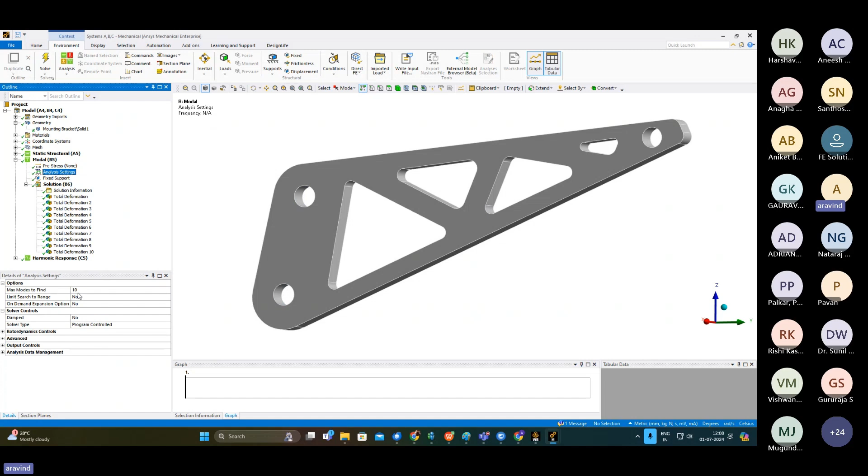In the modal analysis, we can extract up to 10 modes, which means up to 712 hertz. That is the maximum operating frequency. So we can restrict it to 10 modes so that the computational time can be reduced.

Here in the modal analysis, we are not going to define any of the loading. We are only fixing the locations or giving the boundary conditions for the system. That is fixing these two holes of the bracket, and then I am going to perform the modal analysis.

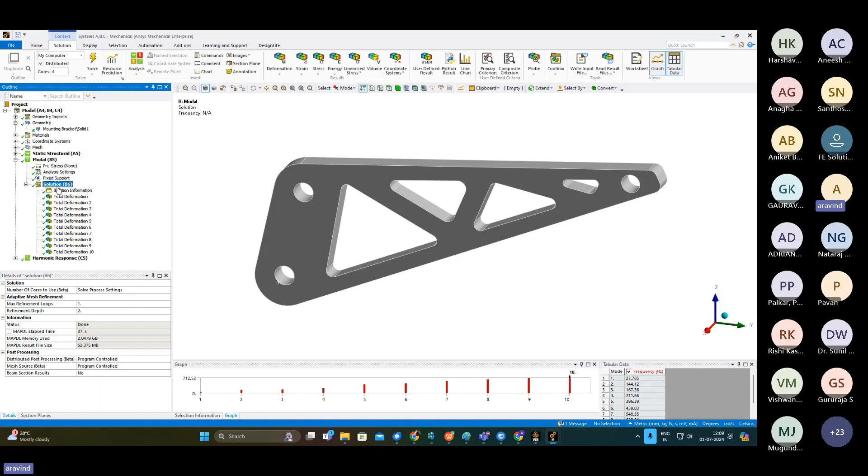I have fixed here two faces, and then I gave the input as maximum of 10 frequencies, and I have solved the problem, and I got the first mode of vibration here, going to oscillate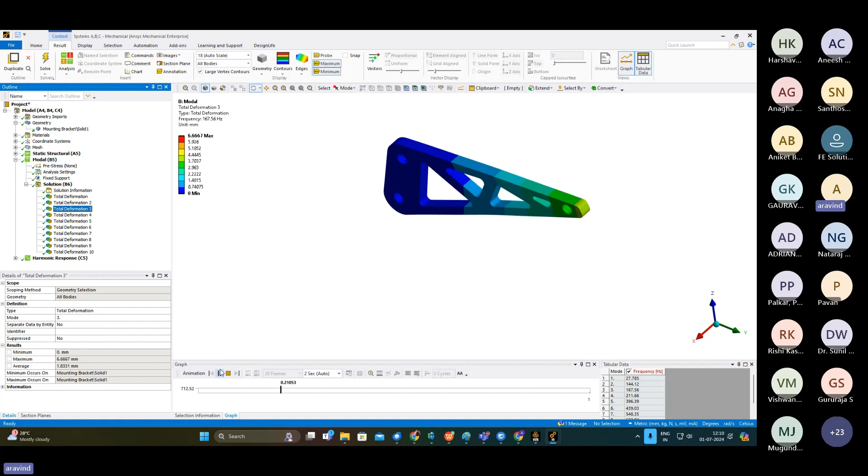in x direction, and the second one with some higher degrees of freedom, and the next one is in z direction, and the fourth one is with a twisting.

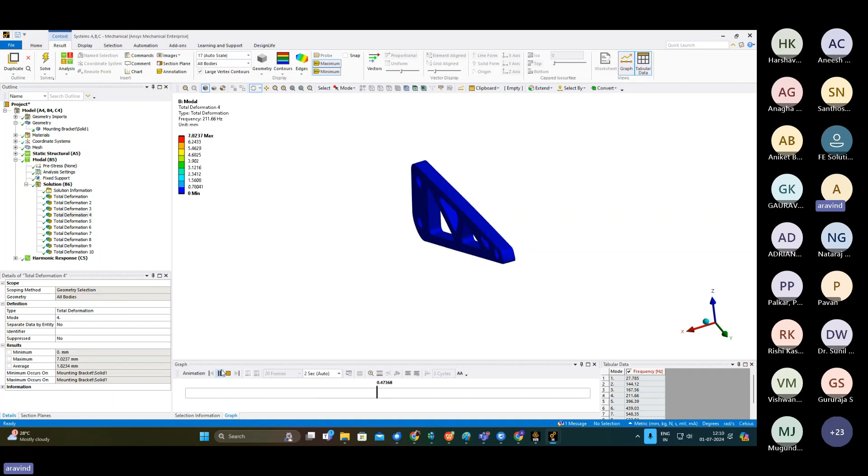Can increase the scale. This will be the true scale, and if you want to visualize better, you can increase the scale and you can visualize it. And the fourth mode, fifth mode, you can look into them.

Later on, we need to perform the harmonic analysis. In the harmonic analysis, we need the mode shape results. So the solution of the modal analysis is connected as a setup file that is an input file for the harmonic analysis.

Under harmonic analysis, we need to give the force that is going to operate sinusoidally. So how the system is going to behave for this load case. That is a force with minus 10 kilonewton in negative z direction.

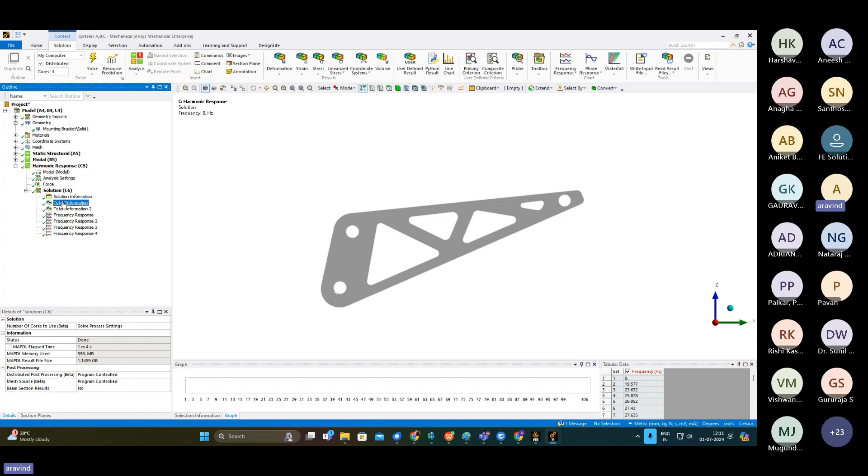For that force, we need to extract the results, right click and solve it. Then you can see the total deformation here. This is you can see the changes, the phase, how it's going to change. At the beginning...

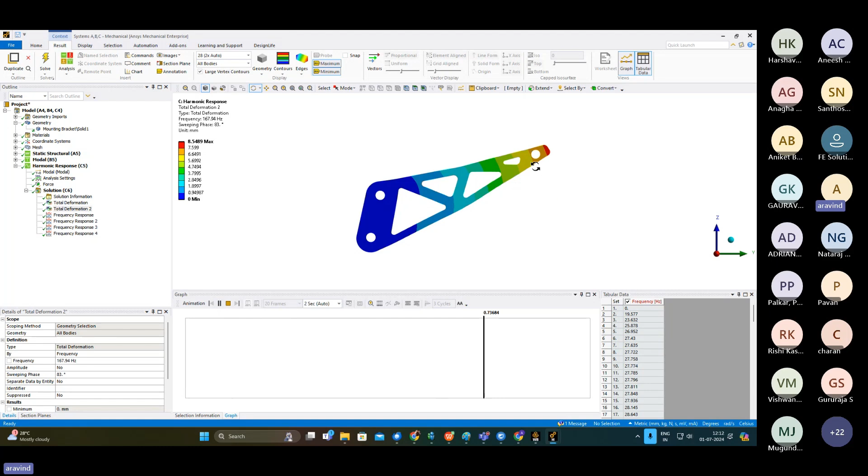You can see the range, like in the first frequency ranges at the beginning, and it's going to have a smaller amplitude. And as the frequency range increases, it starts to have the maximum amplitude of 8.5 that we can see in the response spectrum. That is how to extract this response spectrum, like selecting the point from where you want to extract the FRF.

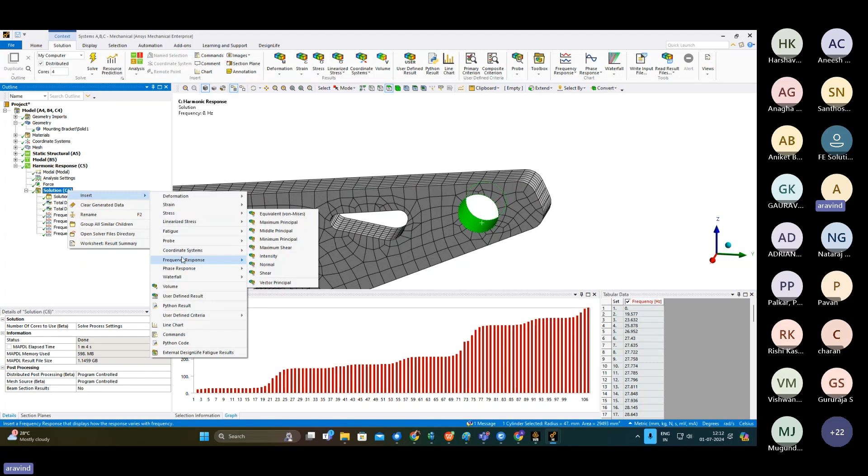Select the frequency response like deformation and evaluate all result. And the direction also important. Give the... you can duplicate without result and you can change the X, Y, and Z direction.

If I give the Y direction, let's see here. At the first mode here, this is a peak value where we are getting about 8 of deformation, which is nearly about 27.

And the first mode of frequency is also 27, which means when you operate this bracket with a force of minus 10 kilonewton, at the first mode of frequency we are getting the response of maximum of 8 deformation here, nearly at the first mode shape.

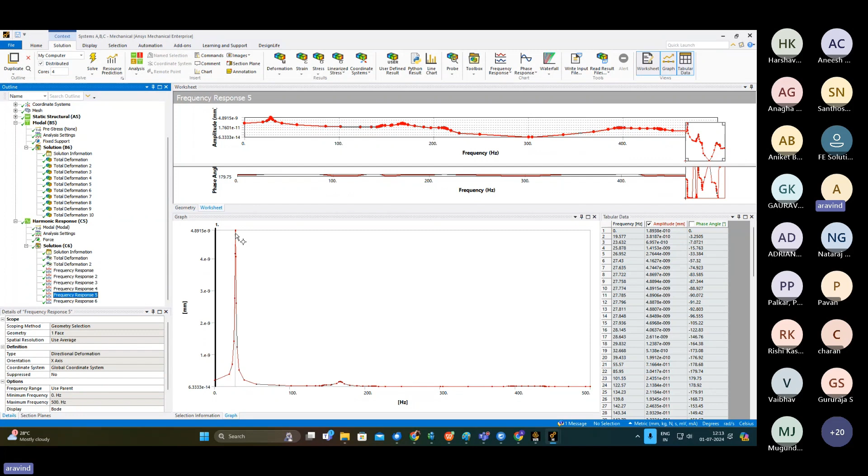This is how you need to extract the FRF frequency response, and then we can use some damping and those things to reduce the amplitude.

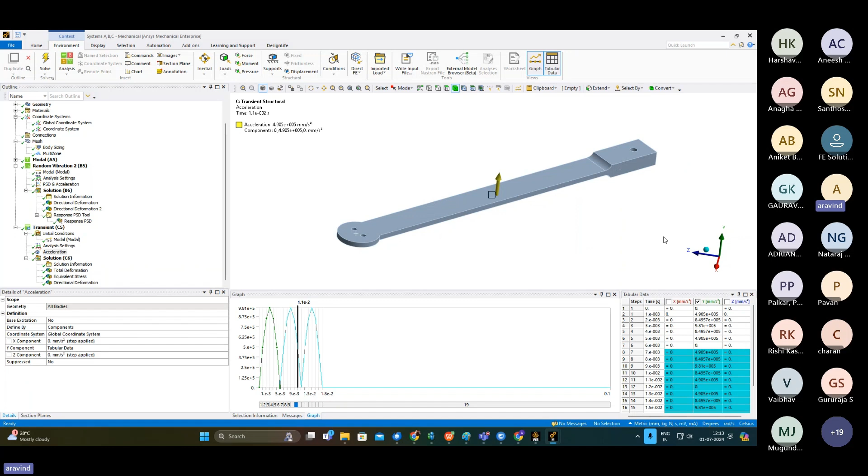The next example is on the transient case and the random case. Here you can see the component is similar to a cantilever beam, but it's an arm of a drone, a drone arm. Same as before, we define the geometry and material, then mesh the component, and perform the modal analysis.

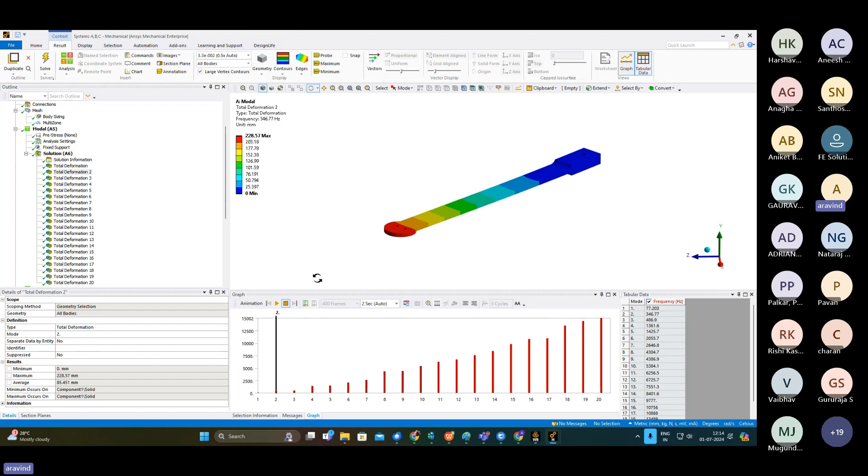I have extracted up to 20 modes, more than enough for this case, up to 15 kilohertz, and the first frequency is 77 hertz. The first mode, and the second mode in the horizontal direction, and the third, fourth, fifth mode are with twisting. So when you apply a twisting force on this arm, it's going to have maximum amplitude at the fifth mode frequency. We need to check whether this load can be sustained by the component.

If you see the random vibration, in the random vibration we can give the input. First we need to perform the modal analysis, and the results need to be connected to the random vibration. Then in the random vibration, we need to give the input in terms of PSD, that is G acceleration, G square per hertz, which we get from the standard for whichever component you are performing.

If you're performing for a railway or an aerospace part, then you need to refer to those standards with respect to that field, and you need to get those standard values and input them. These values will be directly available in the standards.

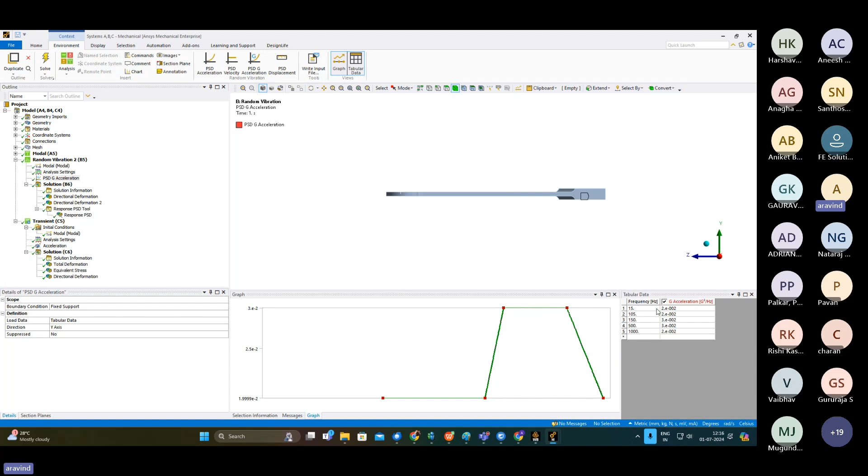Then inserting these values, we can solve the problem, and from that we get the maximum deformation and also the RMS value. I have considered this vertex here, and I have inserted the response PSD. So I got this PSD for the range of frequency we have operated.

In the transient case, here the shock analysis can be performed. I am going to insert the modal analysis as an input for the transient solution. Under the transient solution, I am going to insert the acceleration condition.

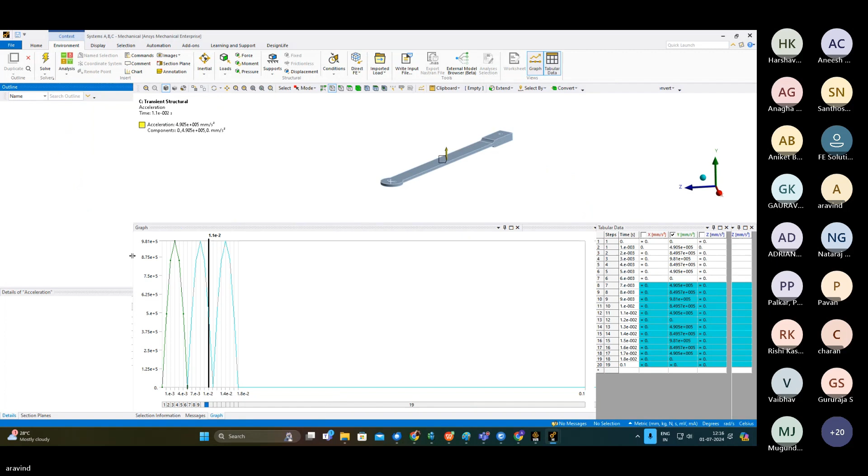Here actually you can see three half sine waves, but it's actually a single half sine wave. I have deactivated these two sine waves, so it's showing in blue color. You can see on the right side the input values.

First we need to input the analysis settings, like how many steps you are going to perform the simulation. That is 19 steps. The first step will be with a sub step of 4, and the step is going to end at 1 times 10 to the power of minus 3 seconds, that is 1 millisecond.

The second step will be 2 milliseconds, 3 milliseconds, and so on, varying up to the 18th step. In the 19th step we are allowing the system to decay in amplitude up to 0.1 seconds with a substep of 320.

We have applied an acceleration of about 0 to 9.8 times 10 to the power of 5 mm per second squared, and it's going to return back to 0, that is with one half sine wave. Then we are going to leave the system as it is, so we can see how the amplitude decays over the time period.

We also need to input the damping factor here, the damping ratio in the analysis system. If you don't insert any damping value, the amplitude won't decay. When you insert the damping, due to its effect, the amplitude is going to decay.

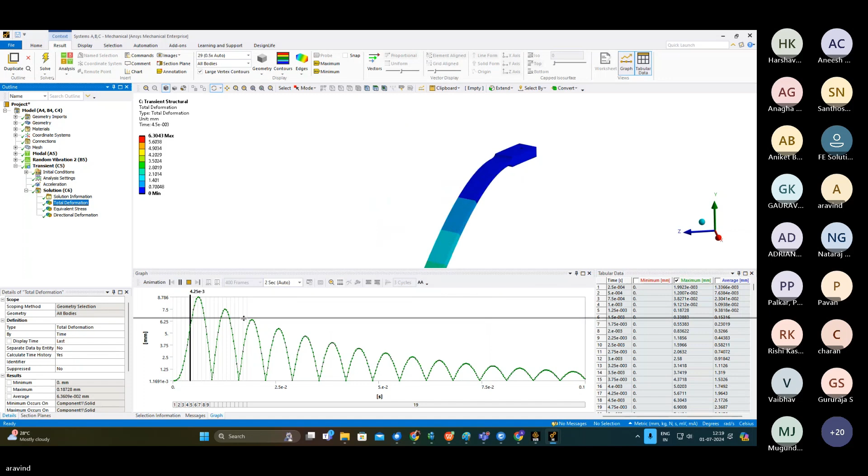If I play the animation, you can see how it's going to decay. It's actually a scaled model; I decreased the scaling.

This is how we can use the transient, random, and also the modal analysis for our frequency-based simulations. These are the 4 examples I wanted to show in this webinar.